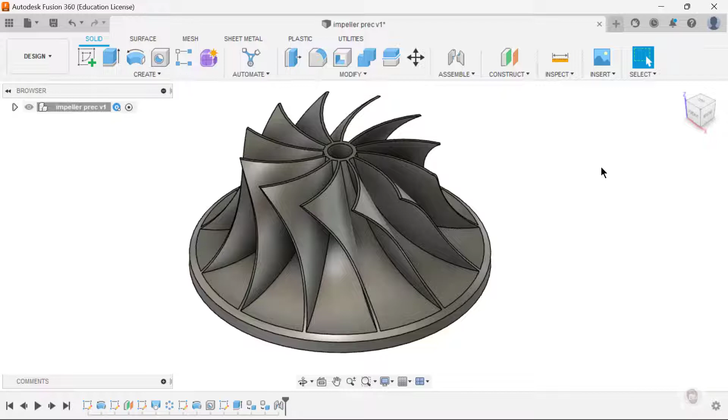By the end of this video, you'll be able to make this turbo impeller all by yourself. Now let's start. New file.

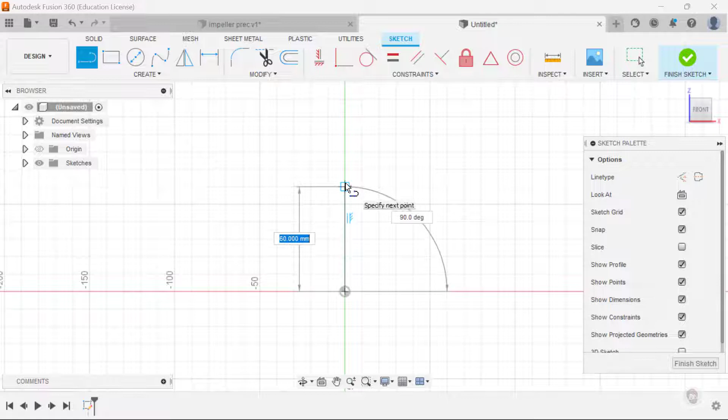First step is you create a sketch using any of the vertical axes. We choose line and create a line from the center at 90 degrees of height 80 mm. Then another line from the center to the right hand side of length 90.

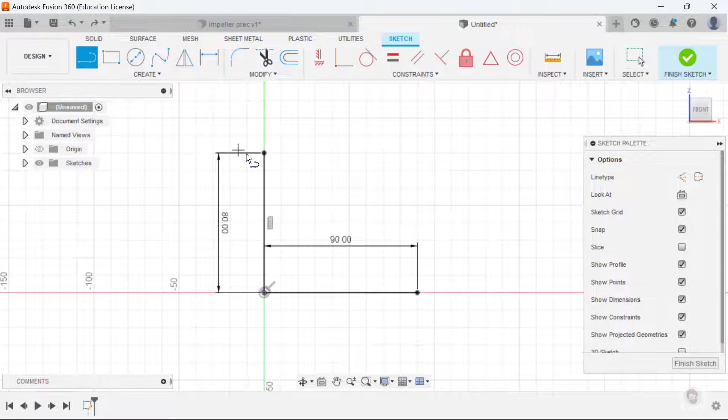We create another line, click this point of 10 mm, another line from here of 10 mm. Make sure to mention the sketch dimension of these lines so that they remain definite.

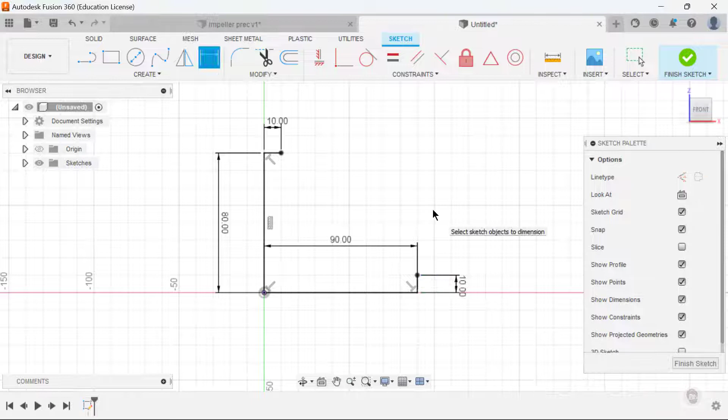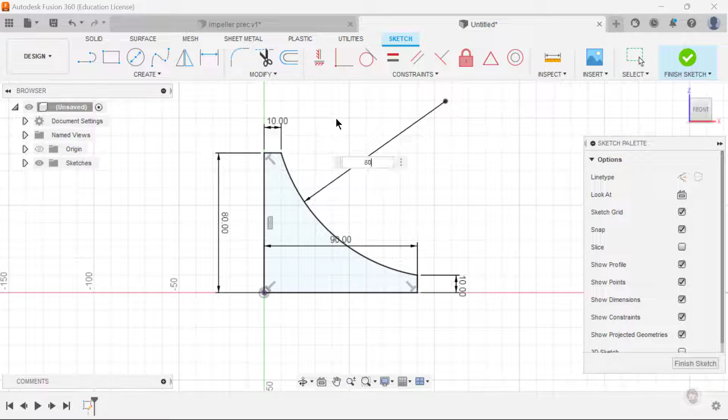Next we create an arc, a 3-point arc. We choose this point and this point and set it up right over here. Click on sketch dimension again and set the radius of this arc to 80 mm. Finish sketch.

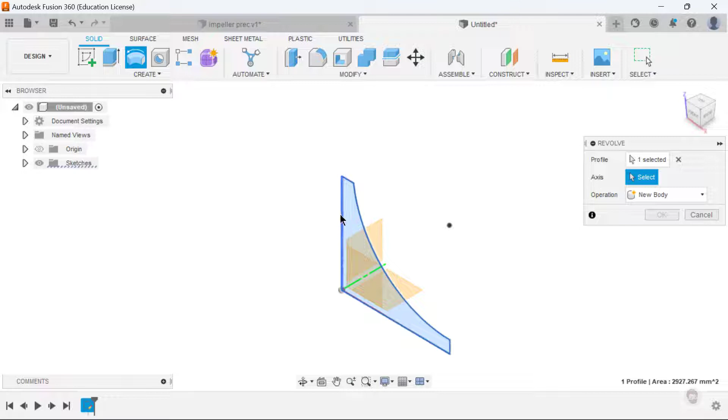Then we click on this profile, go to create, and select Revolve. As you can see, the profile has been already selected. Next we choose the axis, we choose this line, new body, click on OK.

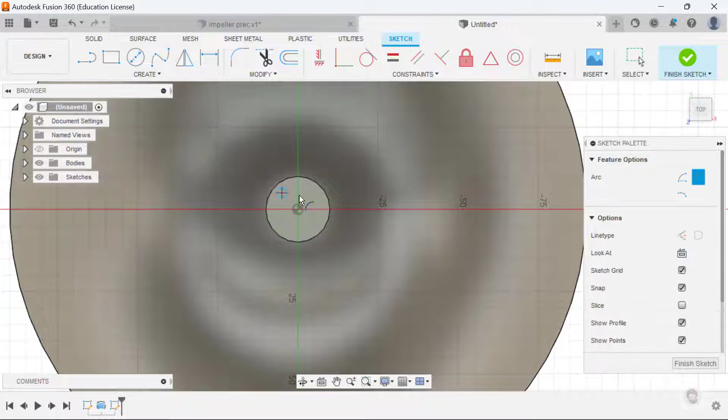Create a sketch on the top of this model. We again choose a 3-point arc, click on the center, and click on any point right over here.

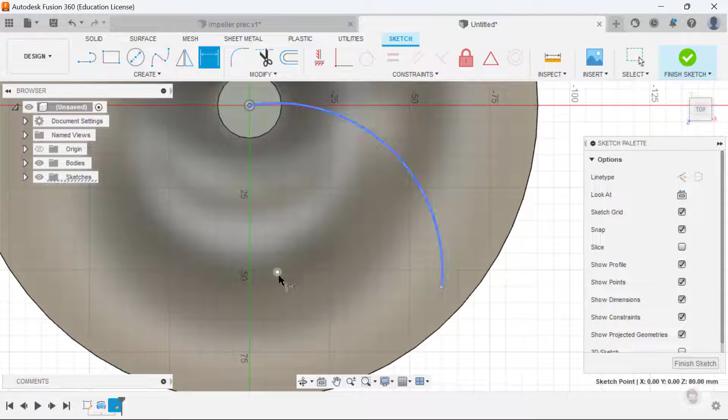Now click on sketch dimension, click this center and this point. We will set this distance as 65 mm and we will set the radius of this arc as 66 mm.

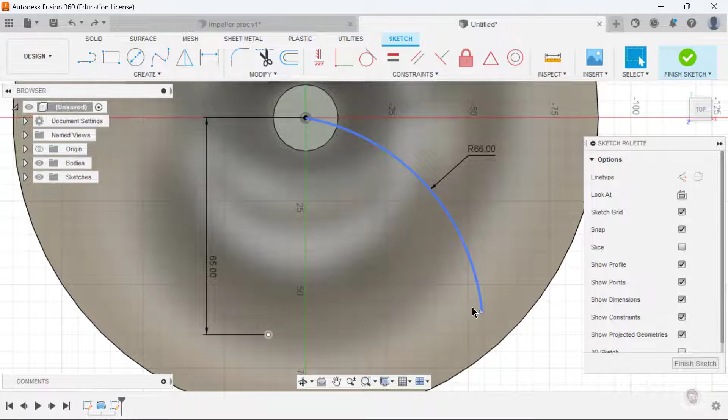After that, just click on select and drag this point a little bit right over here, around here. Just don't take it outside the circle.

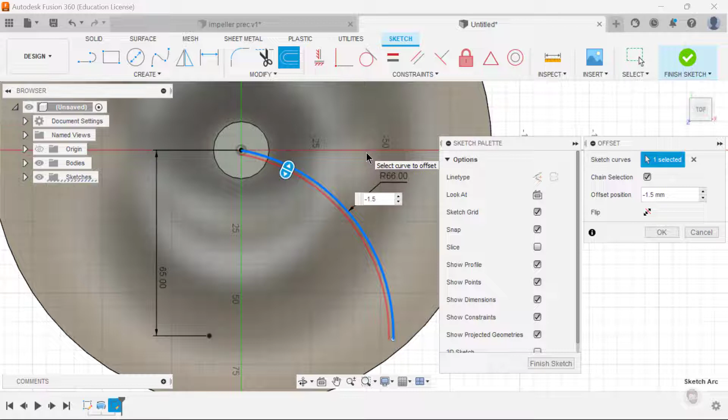Next, we create an offset. Select this arc, create an offset of minus 1.5 mm. Click OK. Then again, select line, click on these 2 points to connect them, and click on these 2 points to connect them. Finish sketch.

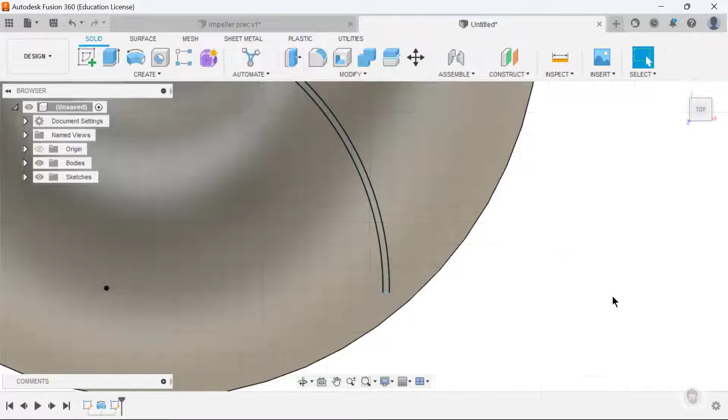Now, next step is to create offset plane at the bottom of the model. Click on the bottom of the model and take the distance minus 9 mm. Click on OK.

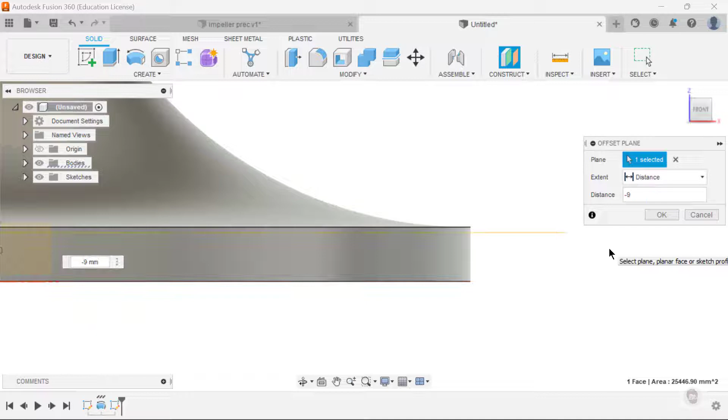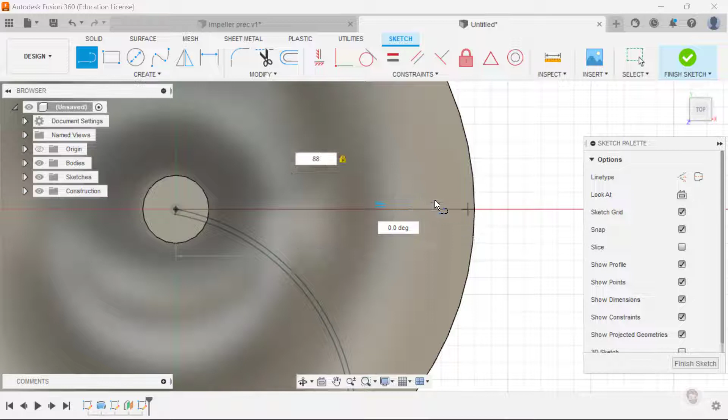Now we create a sketch on this offset plane. Choose line, click on the center and create a line of distance 88 mm. And we create another offset, this line of 2 mm. Click on OK. Again, connect these 2 points.

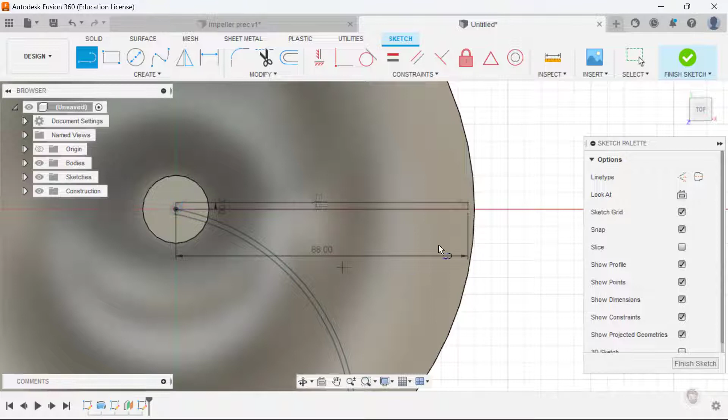Finish sketch. Next, we click on loft. Choose these 2 profiles, and you'll see that the loft we are creating is actually cutting through our model, which we don't want.

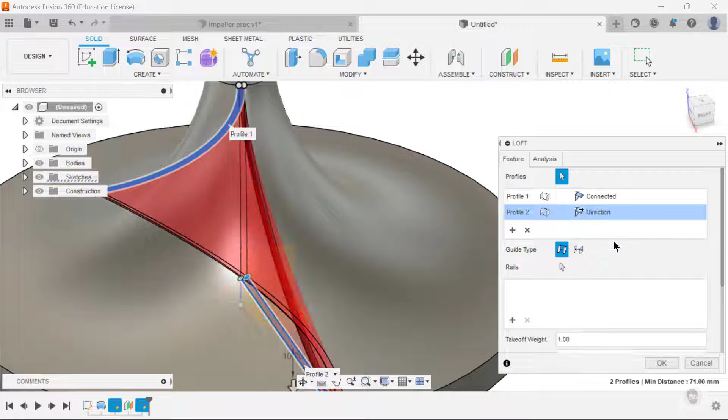So the first thing you do is on profile 2, select it to direction, and the operation join. Also, you have to edit the takeoff weight, set it to 0.5. Click on OK.

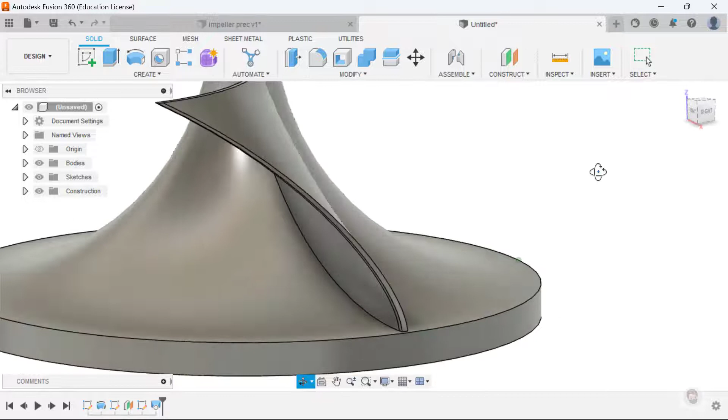Now this is your first blade. Next thing that you do is create a pattern. Go to pattern and select on circular pattern.

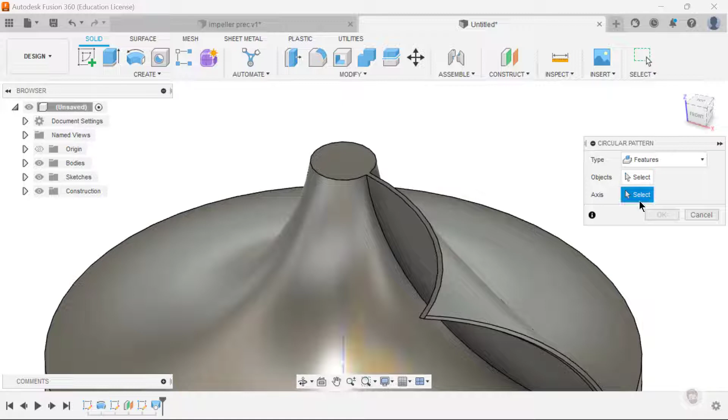We choose the type as features. Choose the axis as the top axis of model, and this blade. Quantity, we set it to 12. Click on OK.

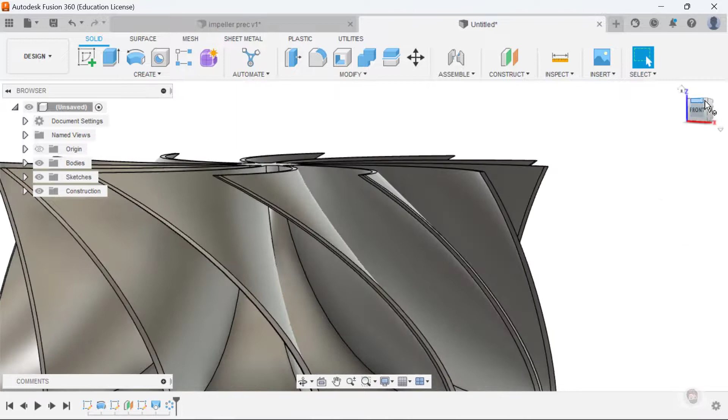Now, it's looking really good now. We're almost there.

Click on sketch again. Choose one of the vertical profiles. Create a center diameter circle anywhere. And set the radius, the diameter, 137 mm.

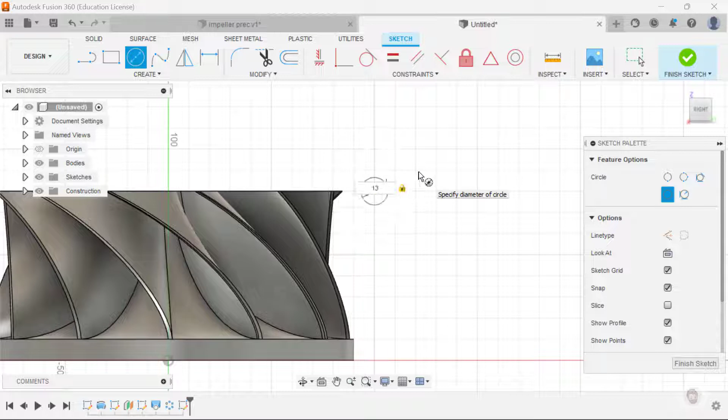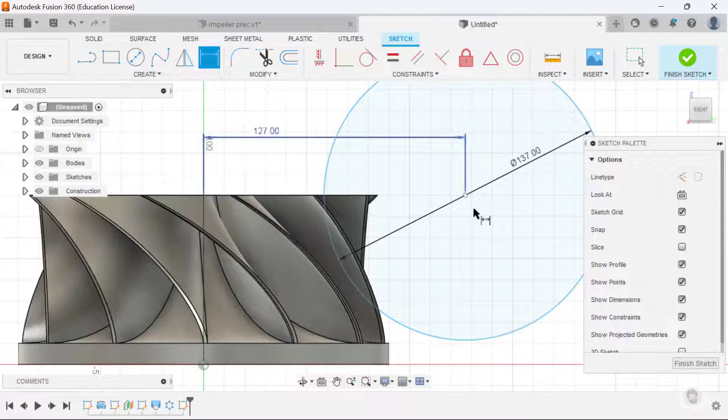Now, we go to sketch dimension, click on the center of the circle and the center of the plane, and set the distance to 127. We again click on the center of the circle and set this distance to 65.

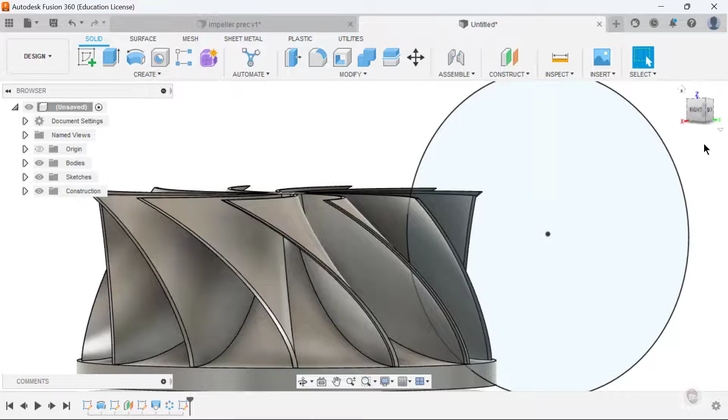Now after you have created the circle, choose the profile of the circle, click on press pull. We will extrude now.

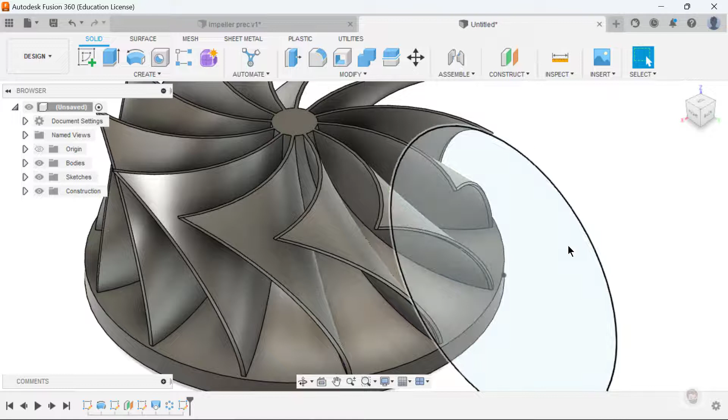After you have created the circle, we click on the profile of the circle and click on Revolve, select the axis, and set the operation to cut. Click on OK.

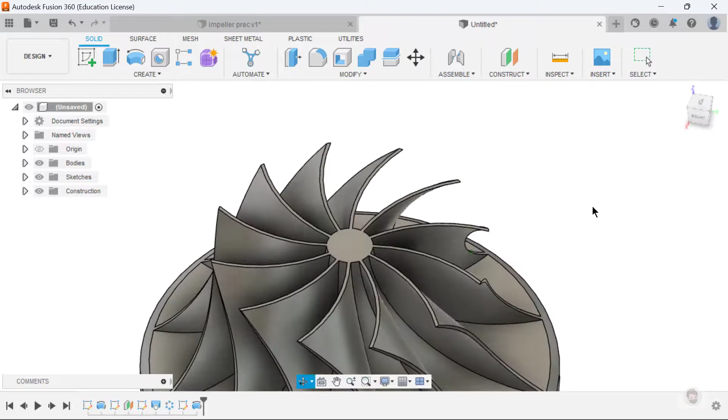It's almost done. Now the next thing you have to do is create a hole. You select this profile, click on hole. Go down here and select the drill point as flat and the diameter 15.

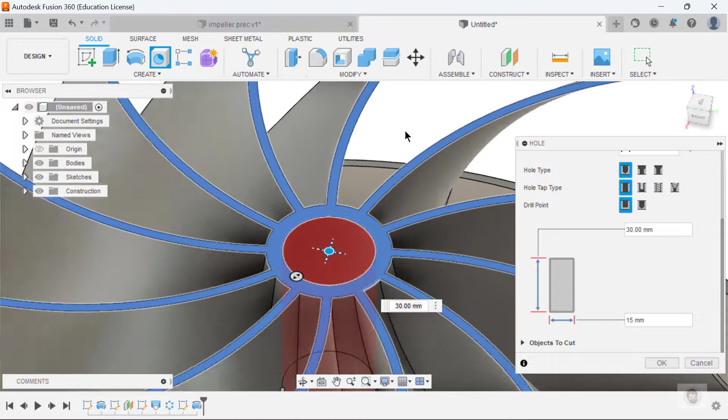Click and drag on the hole and it will snap to the center of the model. Set the distance to 30. Click on OK. And it's done. The centrifugal turbo impeller is now ready.